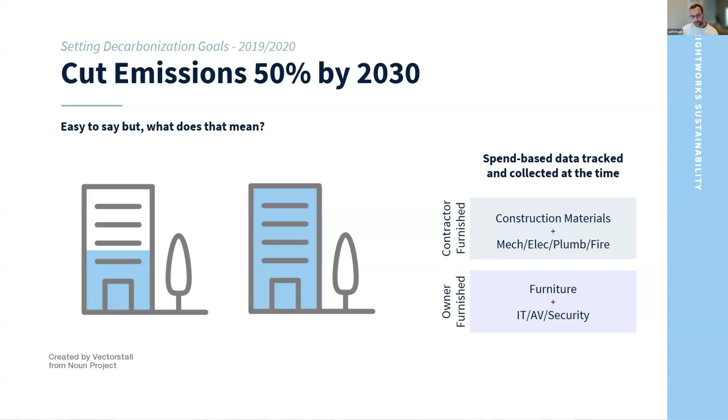And so when they're setting a target to be 50% by 2030, what is 50%? Like, what is that actually of? And being able to understand that full picture. The project that we used initially to try and do some quantity takeoffs kind of proved to be riddled with challenges and problems in terms of accurately reflecting the bill of materials.

Pulling information or quantities out of the project often meant that we were missing overages and products that were purchased for the project, but maybe not necessarily captured. And then certainly lots of information that's put into the drawings. A lot of times there's materials that just get cut down from their original size and aren't represented in the model based on what they were.

So we went down this road of gathering a bill of materials for a project in order to be able to kind of speed this up. And for this one, we had a representative project, Denver, which was 2 floors of their people spaces, gathered everything down to screws and nuts and bolts.

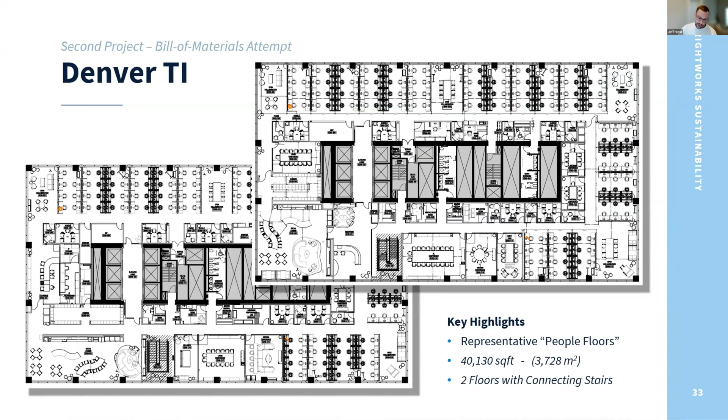At that same time, EC3, or I guess it was before EC3, CLF was developing their methodology to be able to apply uncertainty to the EPD side of things. We recognized that there needed to be a lot more granularity in that data quality, so we started looking into the sector supplement. There also wasn't a connection between all of these different reporting standards that were out there from Greenhouse Gas Protocol and how buildings and embodied carbon actually go into those. And frankly, none of them referenced LCAs or EPDs at the time.

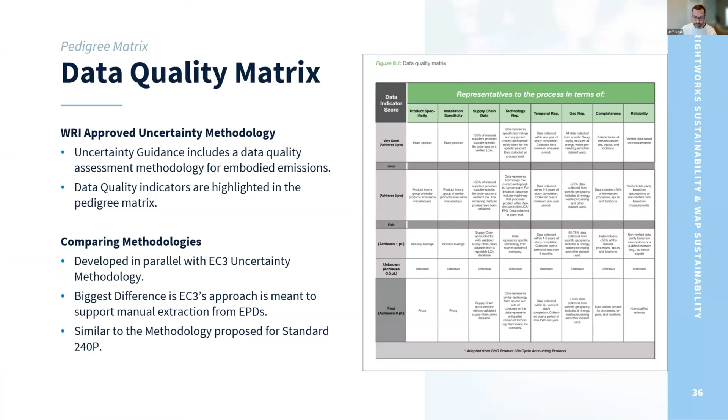So we developed a sector supplement, which is not unlike kind of the precursor to 240P, that has some of these uncertainty calculations associated with it. And we ran all of these products through this analysis and this framework. So every single one of them has a data quality analysis matrix like this, including all of the backup documentation of where the information came from and the impacts overall. And we measure everything with and without the uncertainty so that we can talk about both of those things, because you can do reductions by improving data quality just as much as the others.

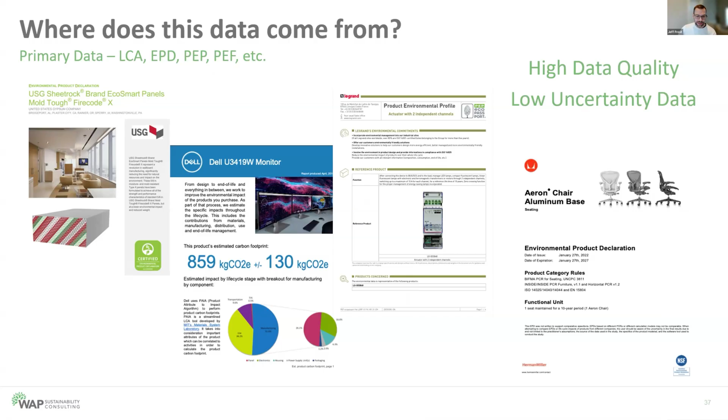You can see various ways that this was applied. LCAs, EPDs, and PEPs are kind of the highest level of data. The secondary data, you're screening LCAs and industry-wide, sometimes some proxy EPDs that are out there. Sometimes it's getting a bill of materials, really trying to understand where these impacts are.

We partnered with WAP in doing this work because for us, it was a way to be able to leverage their understanding of these building systems and the operational systems that go into producing these. Because they do so many LCAs and EPDs, they have an abundance of data and familiarity with how these systems work and how they operate, and working with those manufacturers to understand those nuances, not to mention a lot of data and information that isn't publicly available for a lot of companies.

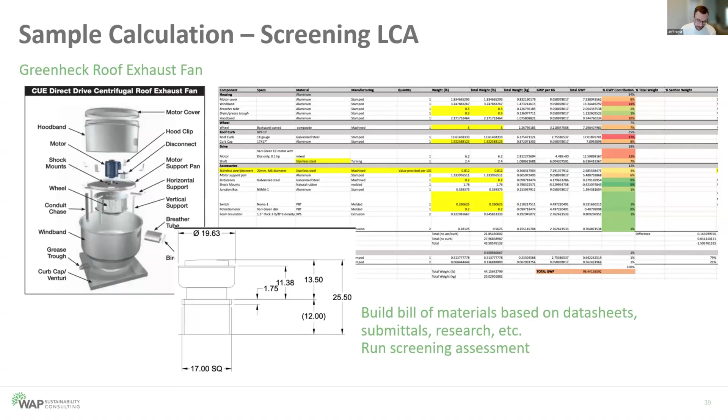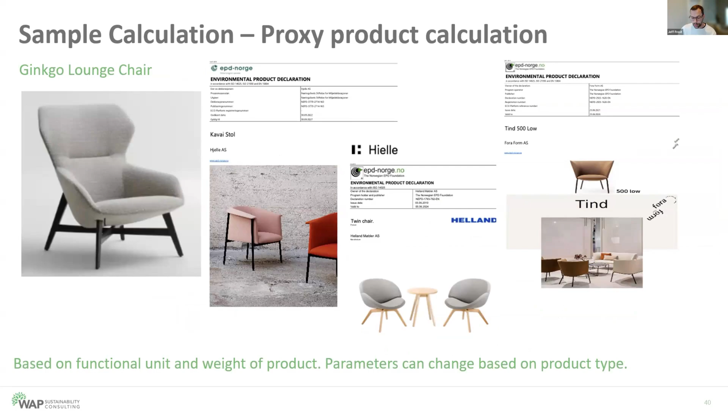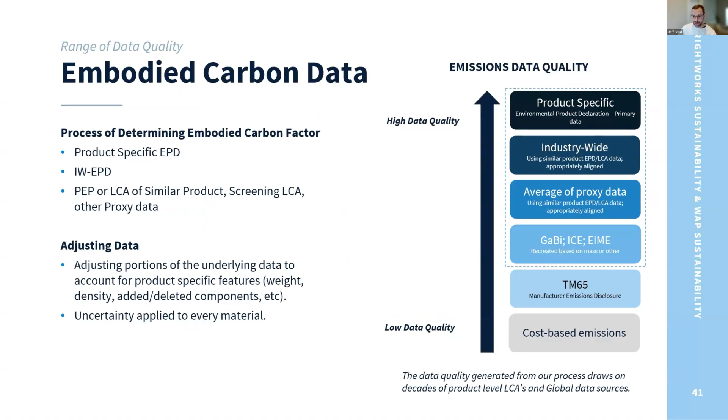For things like furniture, creating proxy products associated with things where we did have value, and we can unpack those similarities throughout it, kind of give you an idea of what some of that hierarchy looks like, not kind of lost on what we typically would see. But again, every product had its own uncertainty assessment.

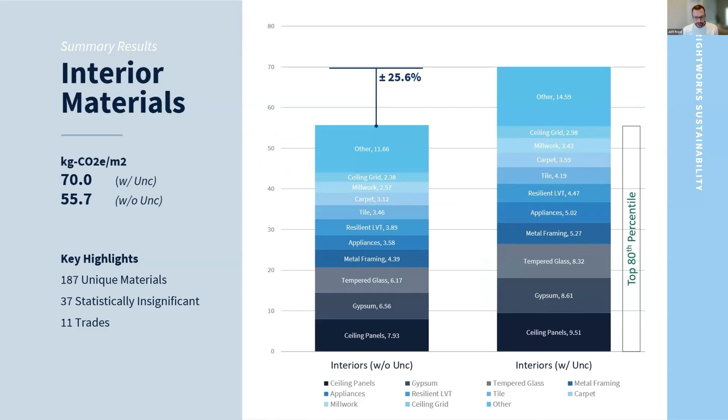So just to kind of pin it all together, interior materials, what you're seeing is kind of without the uncertainty on the left and with the uncertainty on the right. This one was about 187 unique materials. You can get an idea of how they compared to each other in this particular application. They don't really mean much until we combine them all together with some of the other categories. So this is where the program starts to deviate from, I'd say, other studies that have been done, because we looked at everything.

Furniture, again, unpacking all of the pieces and components of this down to rugs and poufs and little vases that are on their shelves. Everything was calculated. So again, 153 unique materials. We actually measured pre and post COVID to kind of understand how differences between having offices versus having more collaborative spaces versus having fewer workstations, and it ended up being pretty small of a difference.

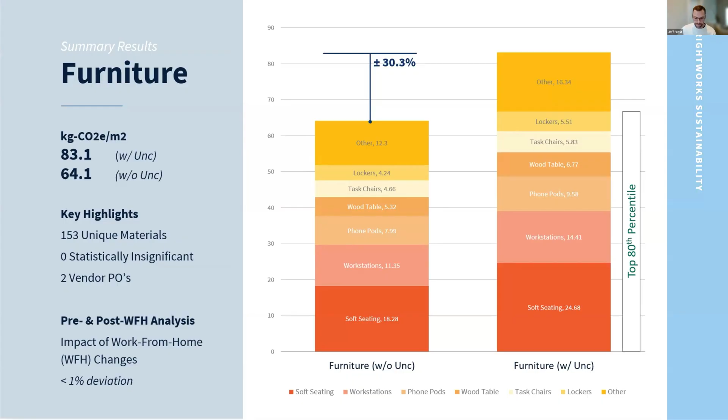Then here you can see we got into the MEP-IT/AV, which was really looking not only at what was contractor installed, but also what Salesforce was procuring for those particular projects. This one, as you could imagine, was close to 600 materials that were in there, 11 different trades that were integrated. And again, you can see the spread without uncertainty analysis on the left, with uncertainty on the right.

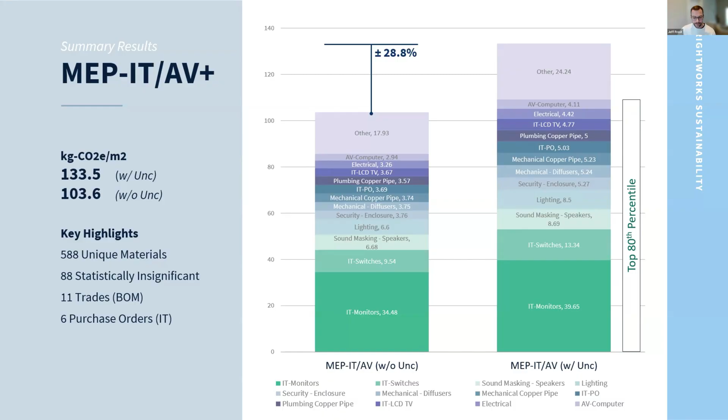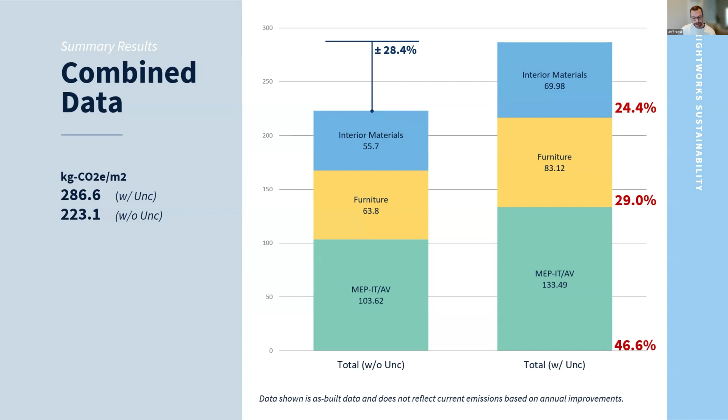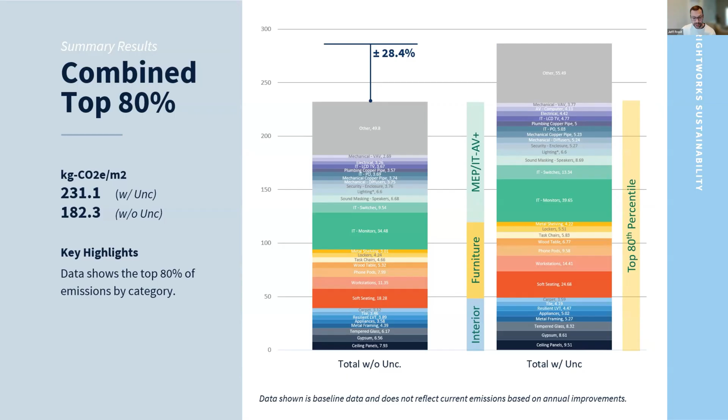When we combine this data, you can get an idea of how this breaks out. About 46% of this is tied to the MEP. Again, without uncertainty on the left, uncertainty on the right. A little bit more of how some of this breaks out, understanding the 80th percentile of each of these categories, again, to help us prioritize where the best options for reductions are. This was another way to look at this, in reducing order of magnitude.

And what I wanted to point out was when we talk about whole building LCA exercises, you see these little green highlighted materials that are in here. We're often focused on those in terms of advocating for reductions. But you can see that a lot of other material sources are high on this list that we're not advocating for, that aren't part of these conversations usually. And so finding ways to start to open up this conversation.

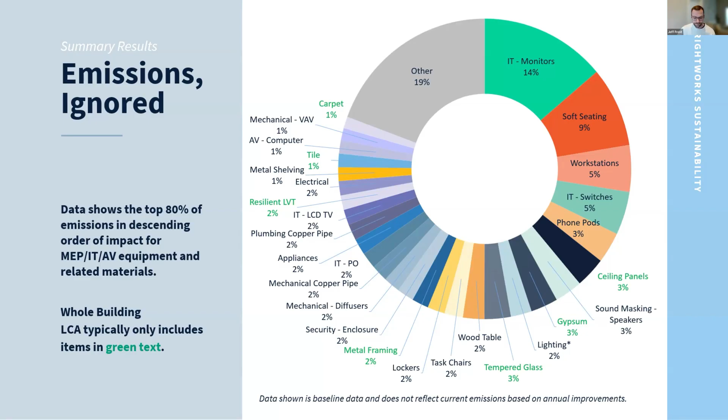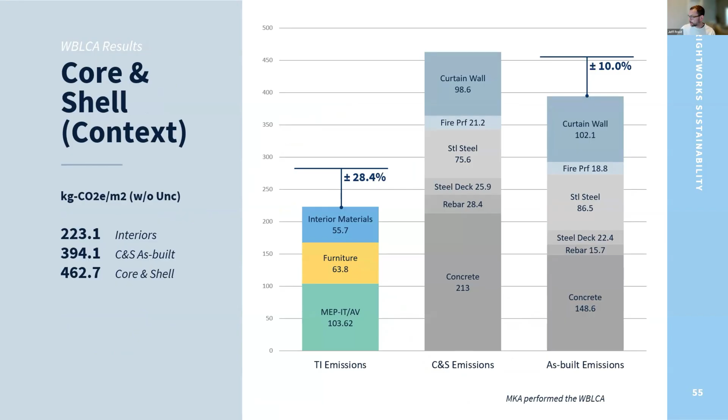We did some comparisons overall for how this compared to the core and shell of one of the projects they were doing. This happened to be a tower in Chicago that MKA did the whole building LCA on. So giving an idea of how those two compare to each other. Also looking at how these build up over time, assuming 5 to 7 year renovation cycles, how that compares to the original build. So again, looking at order of magnitude.

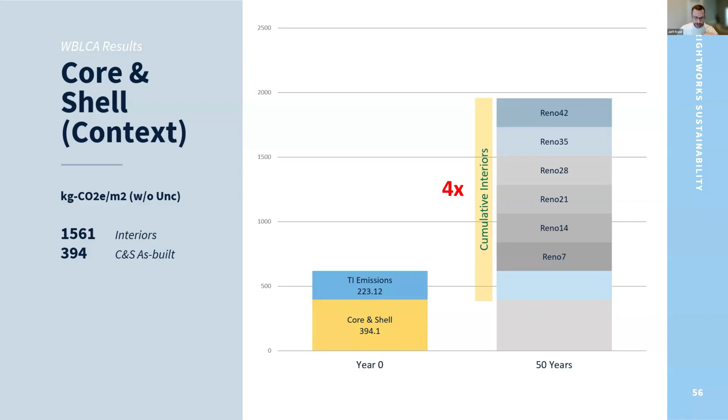I'm not going to linger on a lot of these slides. We have a blog post that actually has all of these in slide format so people can use them and take them. We definitely want people to understand what this issue is and start to talk about it.

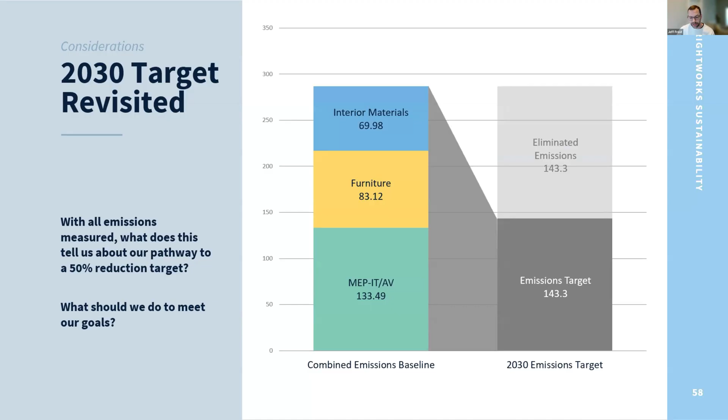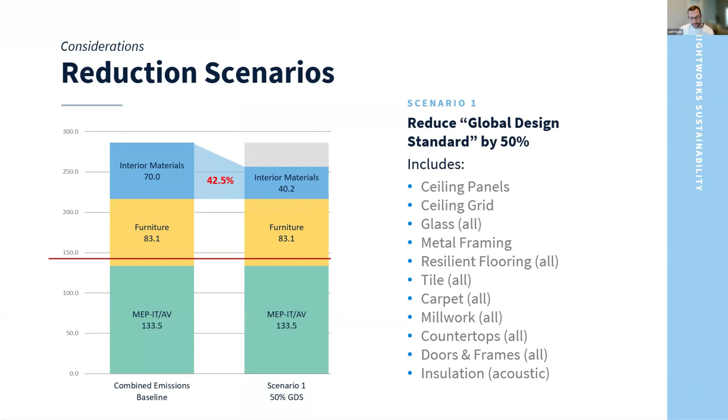But if we get back to the 2030 question that our clients were asking, what does it mean to get to 50%? We now know what that target is for them, and we can define that milestone. If we look at what we're reducing from an industry perspective right now, if we're just thinking about what is in a whole building LCA and the materials that we're seeing on the interiors of these projects, we're not getting far enough in a reduction to get to that 50% threshold. If we increase that analysis to a 50% reduction across all of those TI materials and a 50% reduction in furniture, we still don't get to that threshold.

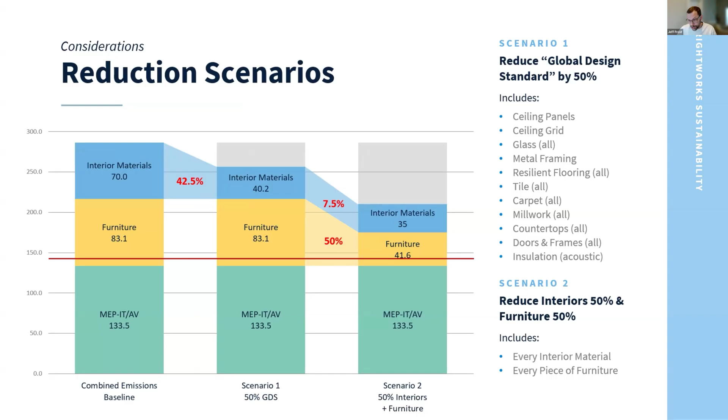Now we get to the question of the MEP component of this. For us, this was really about understanding the cycles of manufacturers and their designs and their understanding of embodied carbon. Product cycles don't happen every year. They often take 3 to 5 to 7 year cycles. So manufacturers who are putting out things today are going to take even more time to engage. It's going to take them time to produce EPDs, understand the relevance, and start to embed practices that will inform the next design. So the idea that we're going to get there by applying MEP reductions close to 50% didn't seem realistic. So we gave it a conservative estimate of maybe a 25% reduction for MEP, especially considering a 10% grid improvement that could benefit them.

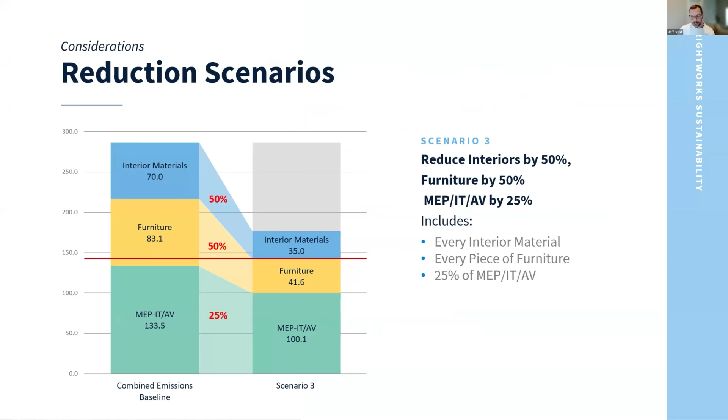And the punchline really is, even if we do all of that 50% across all of those, and we do get the 25% for MEP, we're still not hitting the 50% reduction. We have to get to a 72% reduction for interior materials and furniture, again assuming the same 25% for MEP. So this was really the impetus of like, wow, we've got a lot more effort that needs to take place if we're going to try and hit some of these 2030 targets.

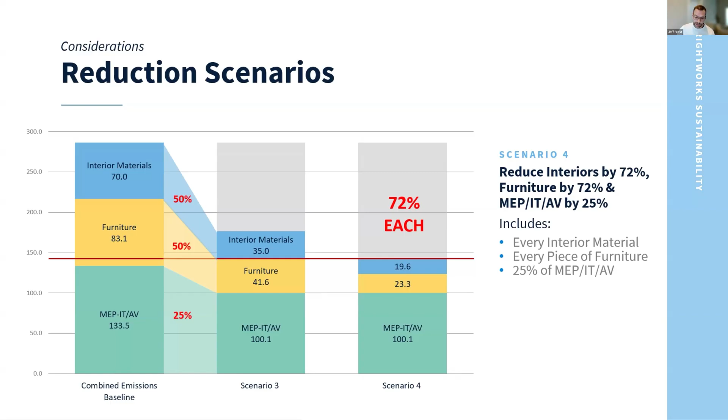And so again, the importance is really about sharing this and communicating this. A lot of clients are just starting to dip their toes into what this work looks like. And I don't think that this is the solution that we want to be sharing with them. I think we want more appealing solutions, certainly bio-based solutions and circular solutions to support this type of work.